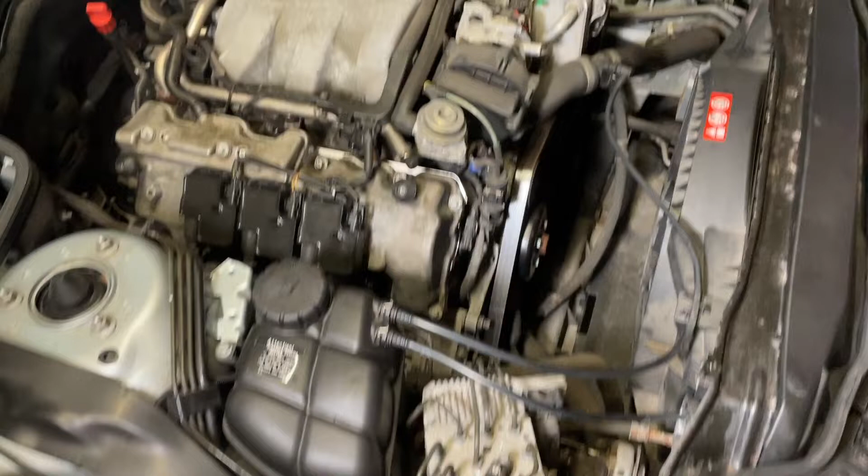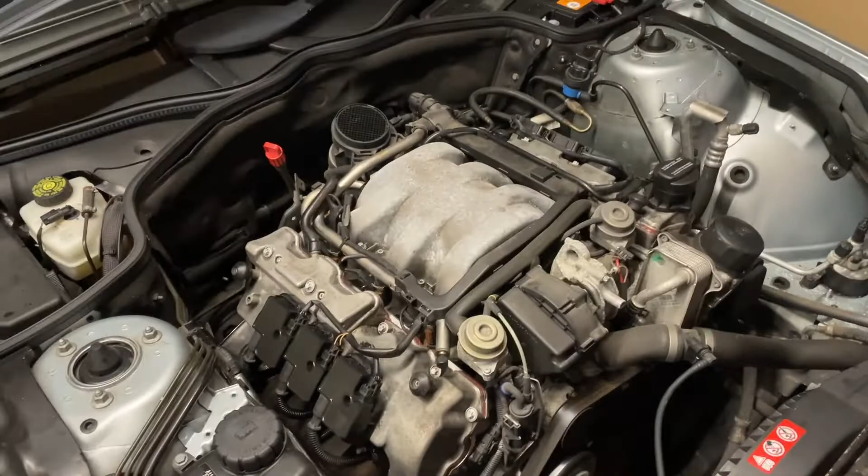Victory! Yes! Even the fuse diagram's telling me to buy an SL55 AMG.

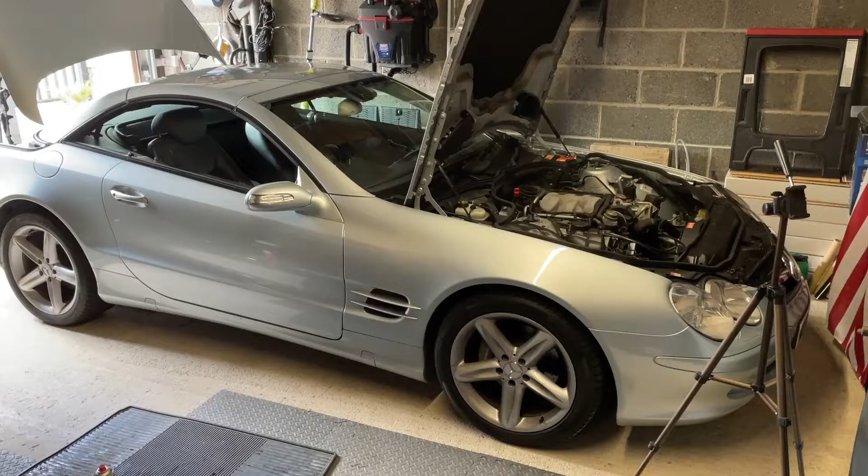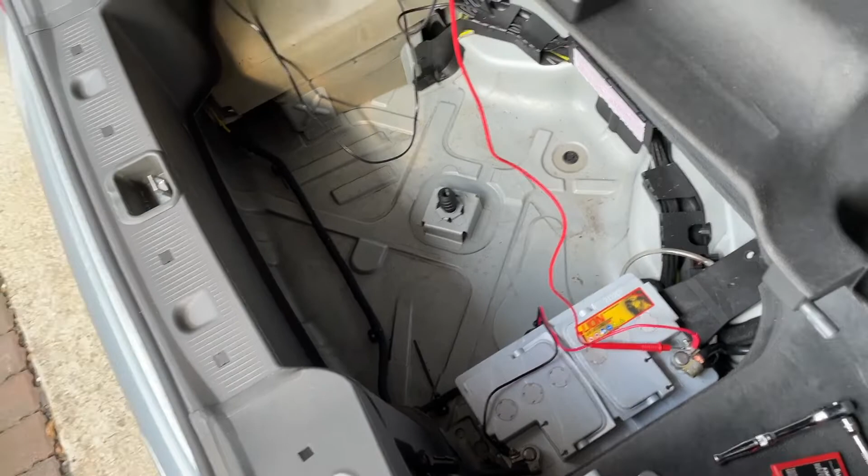Good morning. It is the next day, as in the next day after the last video I released, and the car battery drain issue is still the one I'm looking into. The battery is now back in the car. It's been off charge for about 24 hours maybe, basically since almost this time yesterday.

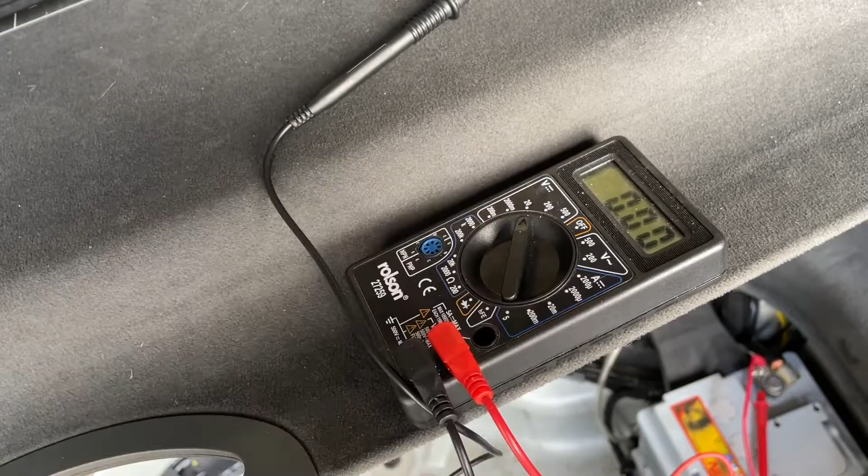And what I'm going to do live is turn the multimeter on to volts. 12.53 volts. So that is pretty much what it was resting at when I had it sitting out of the car. Tiny bit low, but still acceptable.

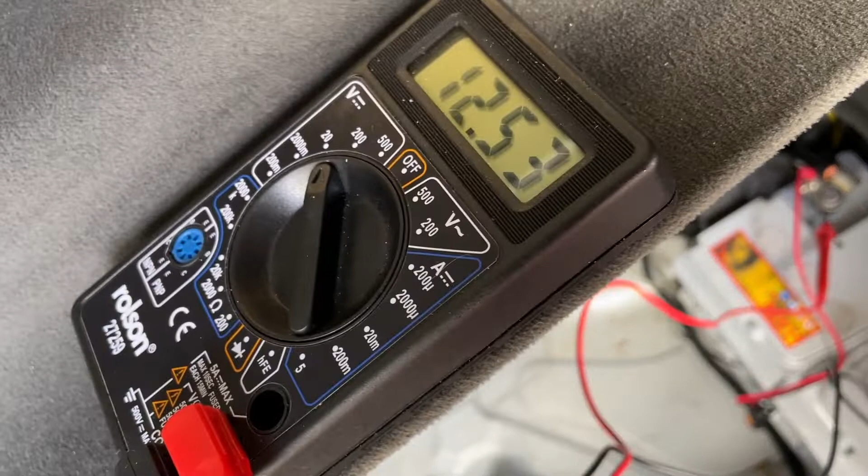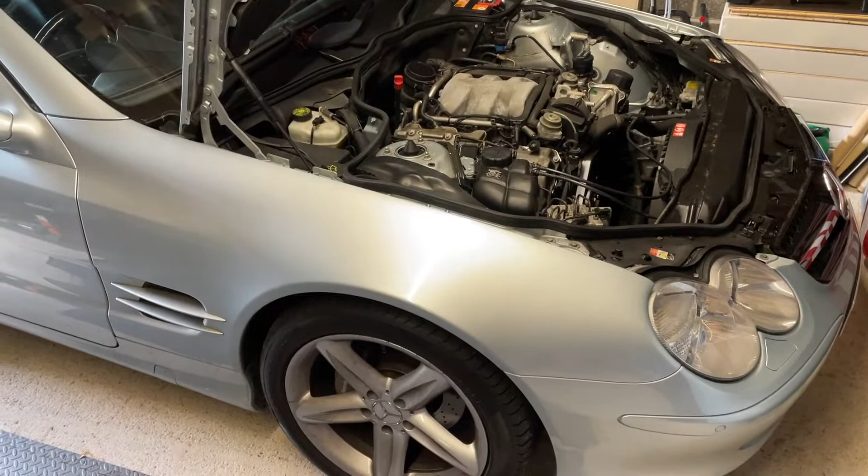Now, what that would suggest is that there isn't a drain at the moment. So what we've done so far is I've taken the battery out the car. It was sitting at 11.4 volts. We have charged the battery fully till it got to 12.6 volts, and we then left the battery sitting for over a day, came back out, tested it a couple of times, and it rested at 12.54 volts. So I've put it back into the car.

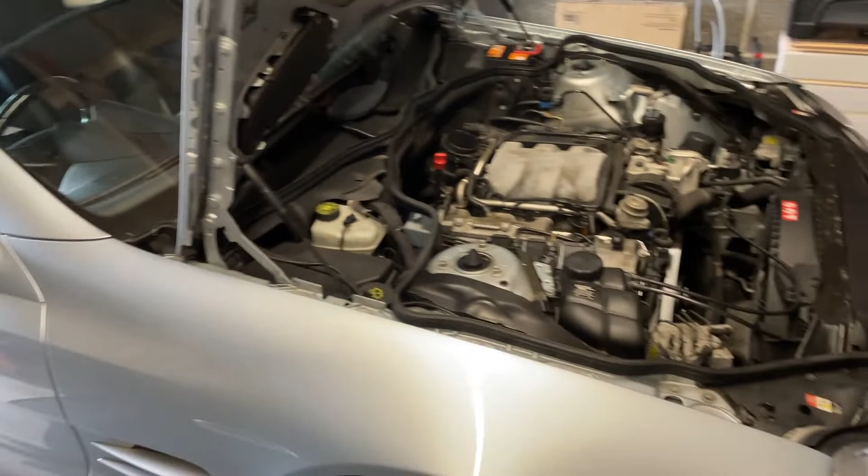Granted, the alarm system isn't switched on, the lock mechanism isn't switched on. I tested it in the car with the car running, so we did run the car with a new valve cover gasket and it's okay. And the alternator was charging it up to 13.6, 13.7 volts, so the alternator's working, it's charging it, and now the car's been sitting, sleeping.

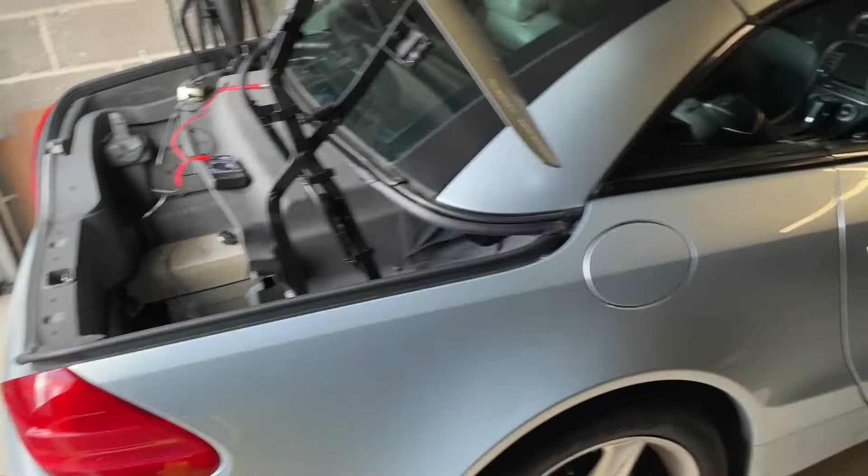All the systems will be asleep. I turned the lights off because I've had the windows open, I've had the doors open, I've got the trunk open, and the trunk light is out. What I should have said right at the start, throughout this whole process I've had the trunk open. I removed that light, that one there. So obviously that would drain the battery if it stayed on all the time.

And the voltage hasn't gone down any more than it did when the battery was out the car. Now that would suggest that there isn't a drain of any significance. If there is, it's a system that isn't on, which is the alarm and the locking mechanism. But I pulled the fuse last night for the lock and for the PSE pump, and it was absolutely fine.

Oh my goodness, this car's been in here a couple of days and there's already cobwebs. What's going on here? Oh my lord, cobwebs everywhere.

Jeez. So if we press this now, this should work because the battery's now been reinstalled.

My helper today is currently sitting in watching Marvel films, so I'm not interested in this boring stuff.

So that's the fuse box that holds the fuses for the pump, the PSE pump, and various other bits and pieces that I will pull and see. If there isn't an active drain, it's going to be difficult to use that method to actually figure out what's going on.

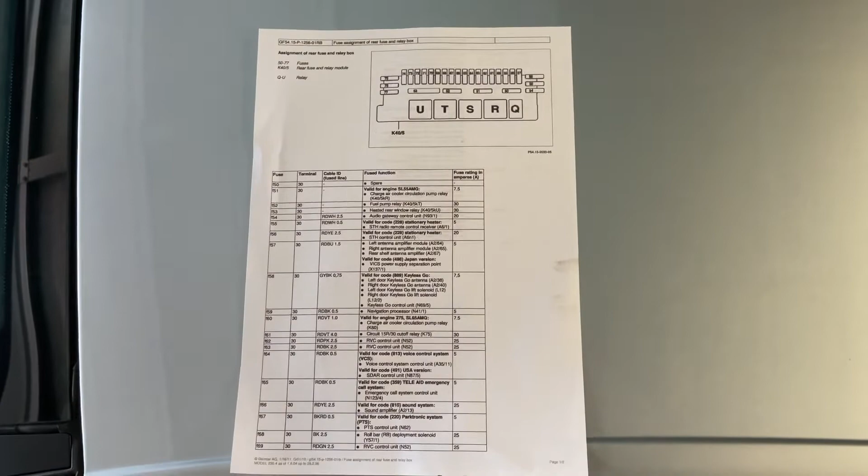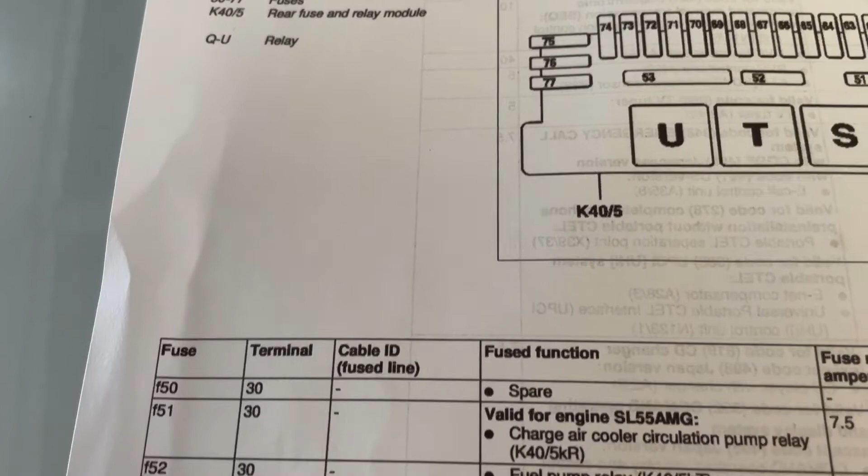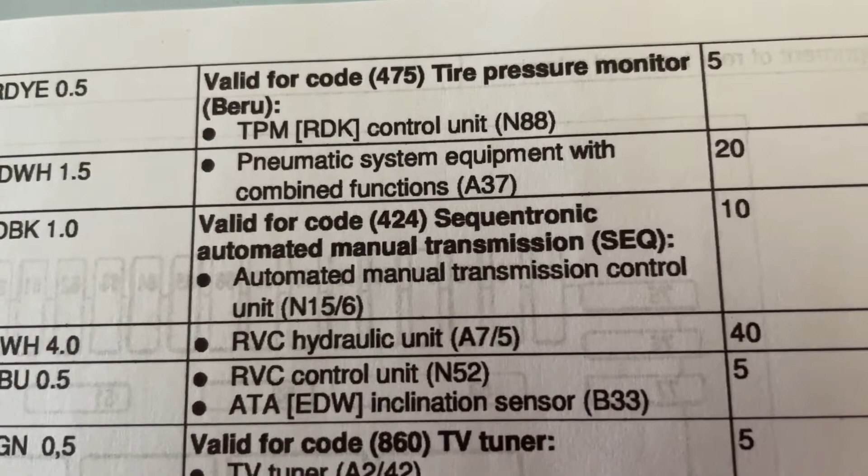So here we have the diagram. You can take a screenshot of this if you wish. This is the fuse diagram for this car, for the fuse box behind, in my case, the driver's seat, but if you're in America, the passenger seat. So there we go. That was, I think I said in the last video, it was fuse number 20. It's not, it's a 20 amp fuse, sorry. It's a 20 amp fuse for the pneumatic system equipment, the PSE pump, and it's position number 71.

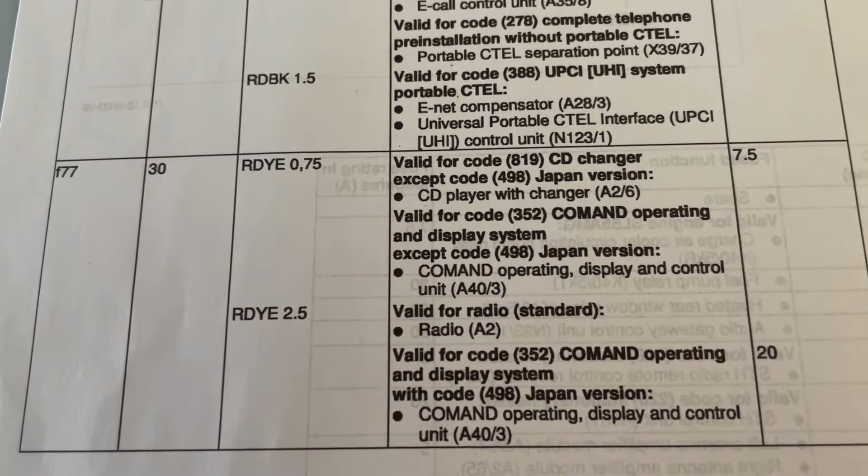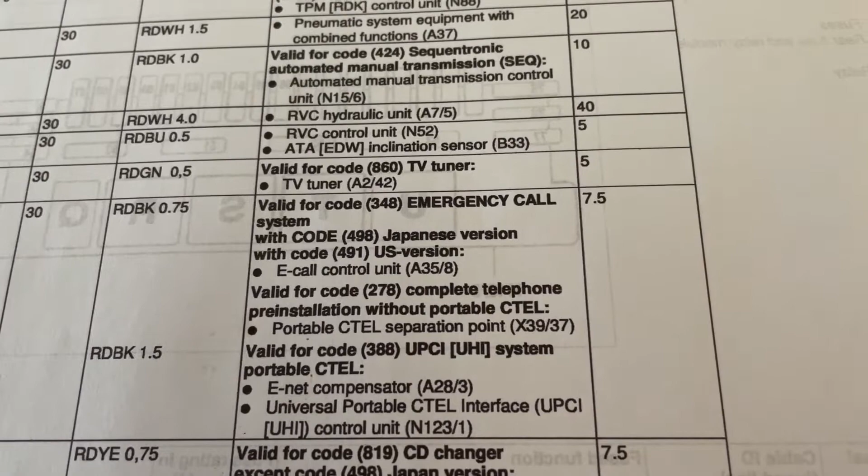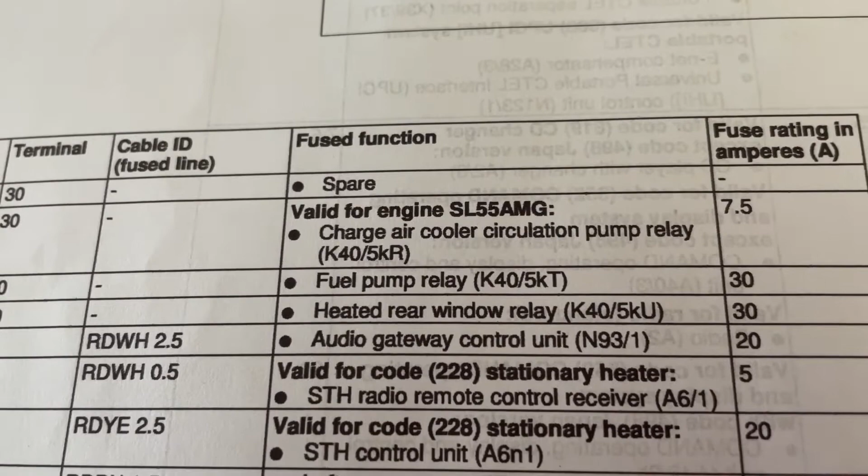So this is quite a handy guide that I downloaded from the web. So we have fuses here for the CD changer, for the radio, which is what I thought it could be, the COMAND system. We have fuses for emergency call system, which I don't need anymore. TV tuner, don't have that. RVC hydraulic unit, control unit, and there's some that are just valid for the SL55 AMG. Even the fuse diagram's telling me to buy an SL55 AMG. You know, it's just thrown it in your face.

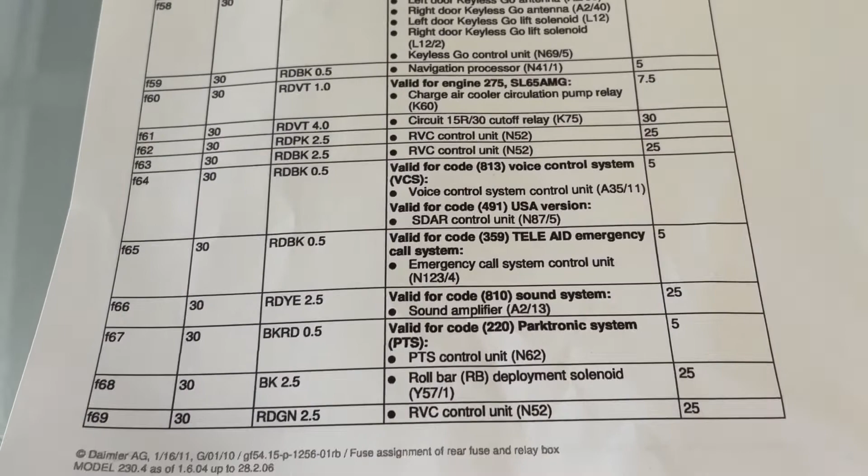So these are the ones I'm going to be checking if we had a significant drain. Now, I did have the drain, it went down to 11.4 volts, so pretty significant. That's basically the battery almost at 50% charge.

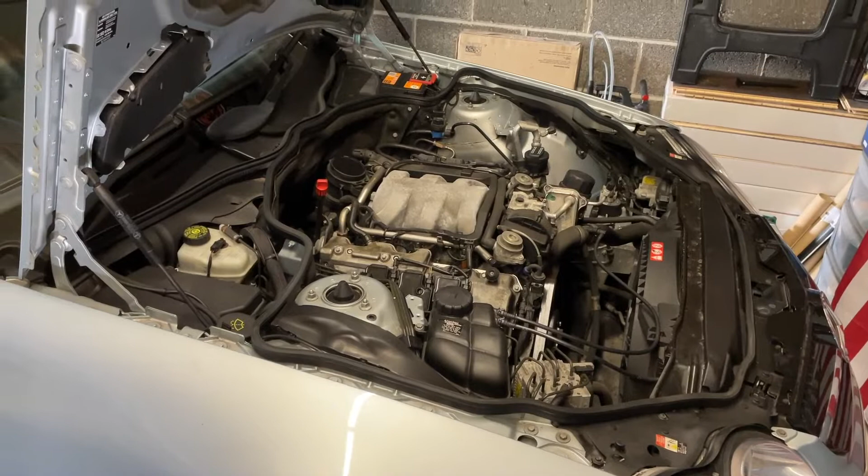What to do now? I think I'm going to get a clamp meter and clamp it round the negative terminal so that I can tell if there's a drain. The multimeter can do it, but you need to disconnect the negative terminal on the battery to do it. So I'm going to get a clamp meter and clamp it around the negative terminal just to prove to myself there isn't an active drain.

What I'm going to try is locking the car and seeing if I can still pick up a drain somehow. If that's the case, it's the locking and alarm mechanism doing it. But I've checked the back of this car, and there doesn't appear to be a tracker fitted with a secondary battery, which means that's not the cause of the drain.

So it could be that dome light, having said that, because I did turn that off last night. Hey, I can live without a dome light. But we'll fix it anyway, so let's crack on.

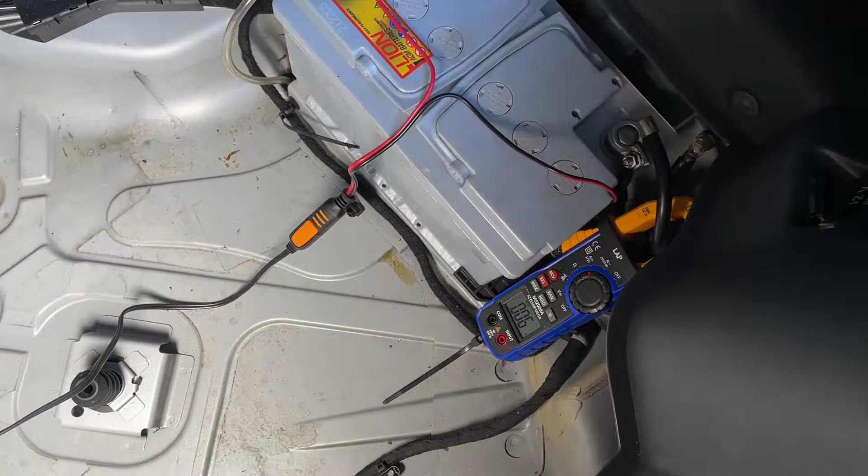Okay, we are back, and the battery's still sitting at full. You can see we've got this clamp meter attached to the negative cable. Right, let's just hold it right there.

Can anyone spot a deliberate mistake? This clamp meter only measures amps for AC current, the little wiggly line next to where the red pointer's pointing. It doesn't measure DC on the clamp meter itself, on the jaws. So whatever reading I'm getting here is probably not correct. Pretty much chuck out anything I'm saying in this section because I don't think this clamp meter is going to be accurate. I'll try to buy another one and attempt to read the DC readings, but you'll find out later that I've got another way of finding out if the battery's okay or not.

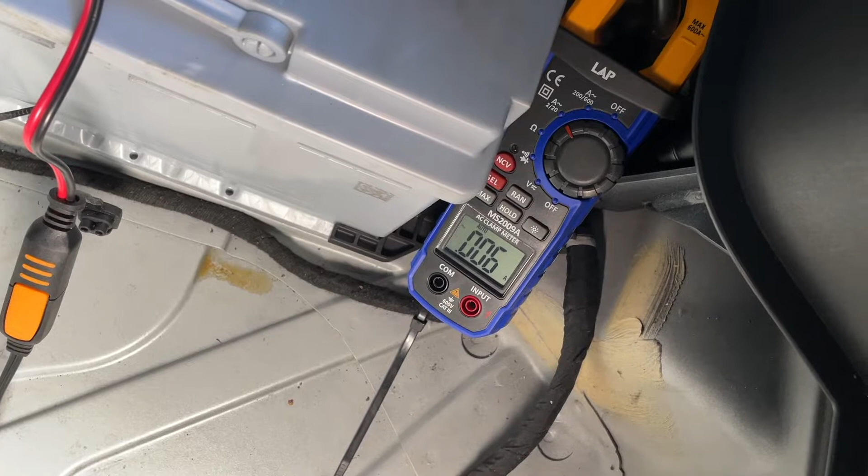And what I want to see is, does the light go out when I shut the boot lid? I'll lose my phone forever here if I can't get the boot open. Well, you tell me, did it?

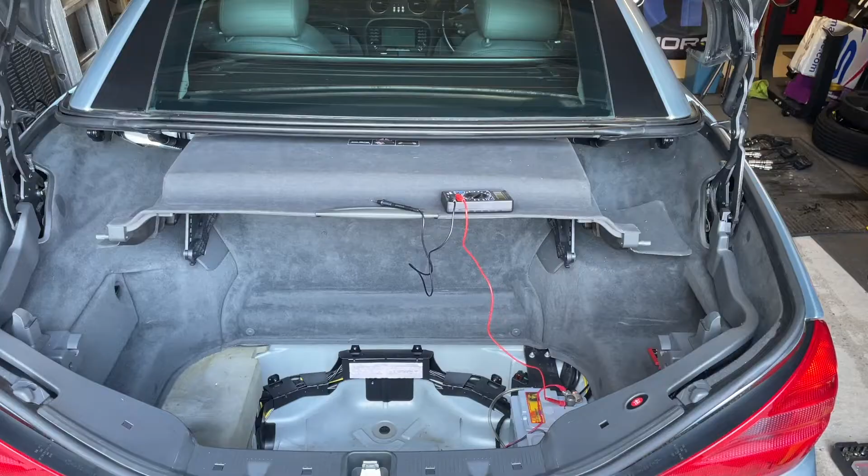Alright, so this is going to be the final test I'm going to do on this battery, because as you can see here, even with this light on and the car sitting resting, there's 20 milliamps, 21 at most, coming through the negative battery cable. Now, comment below if you think that's a significant enough drain to drain this battery over the course of a few days, because when this light's off, that drops to 6.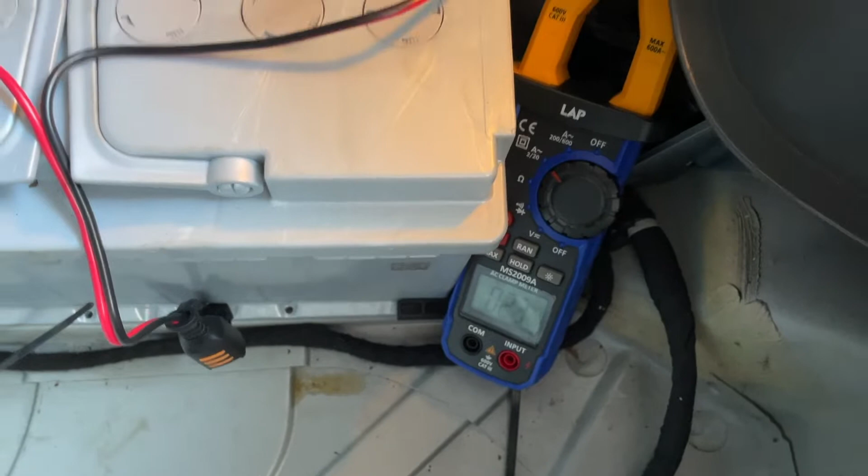I'm not going to take it out just now, I'll just put it back together. And if you look now, the battery has been sitting in the car for about 3 days and it's dipped below 12 volts again.

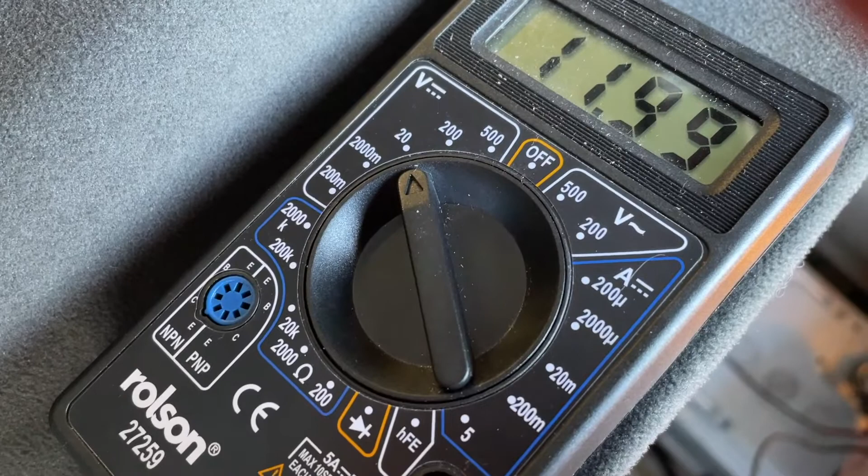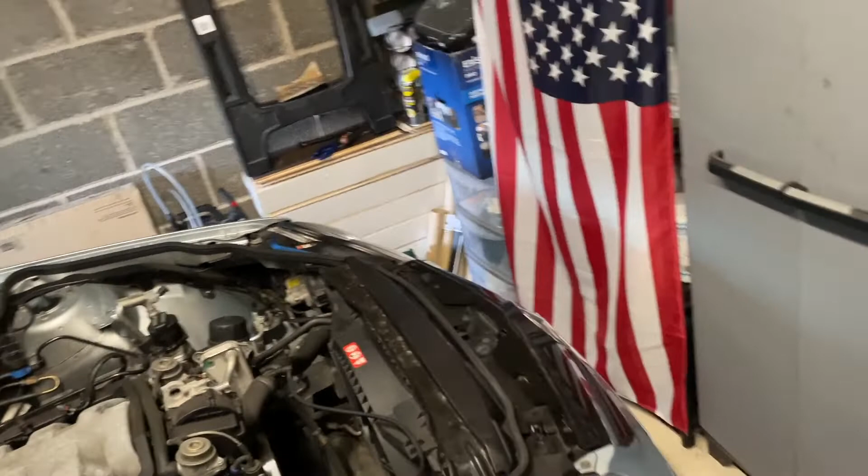So, to conclude this again, the battery is draining out of the car slowly, and according to the clamp meter, there's only 20 milliamps with that little light on, even less with the light off.

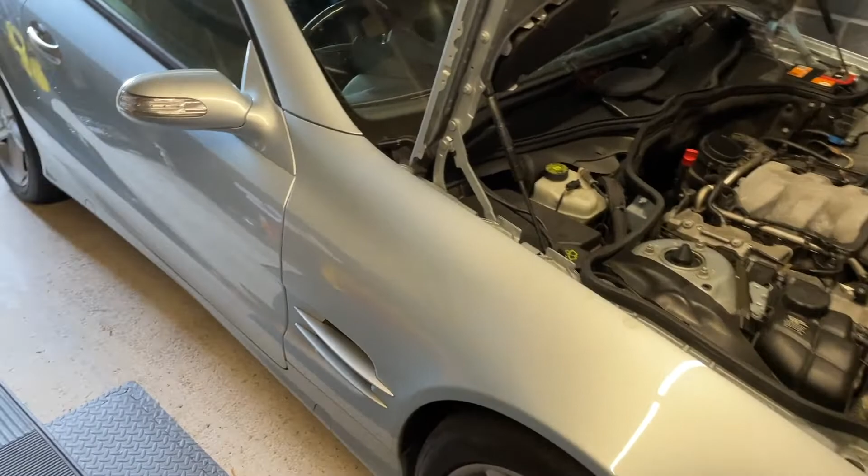So what I'm going to do now is take this battery out and go and return it and get a new one. But I'm going to get a Varta, because this battery was pretty cheap compared to the Bosch or the Varta ones that I could have bought. So let's go.

Alright, there we go, new Varta battery in, which was about £75 more expensive than the Lion one. So I took it back to the shop and no problems at all. They did say that the brand of battery I bought, they've had a few returns for the cheaper brands not holding charge.

So I thought, why not, I'll just get a replacement one, a better brand, more expensive, and it completely rules out any dud battery issues. So I'll check the voltage of this one every couple of days and see if it holds charge, and hopefully that should be the electrical issues resolved for now. Touch wood.

So, okay, so what have we concluded? Well, the battery takes a charge. You've just seen it, there is no significant drain with the car fully locked.

Even after 15 minutes it drops to like 6 milliamps, and there's no drain overnight. The battery was pretty much the same voltage this morning as it was last night. So no error in the dash, everything's reset.

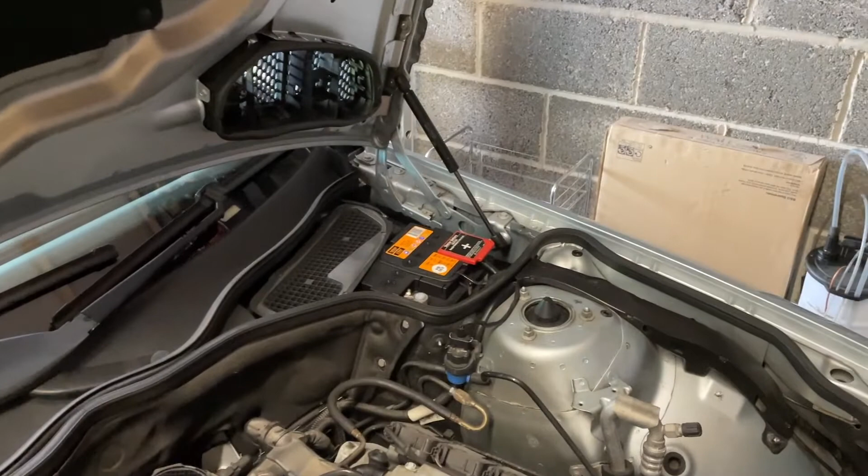There's also one here. There's one in the passenger footwell, I believe, and there's one behind the driver's seat. And there's a fuse just in front of the battery. So there's a few places where you can check fuses, but like I say, it'd be a fruitless exercise for me just now.

But if there's any R230 guys watching this, please comment below with your experiences with a battery drain, because although mine did go down to 11.4 volts, nothing's happening now. It's absolutely fine. So there's absolutely nothing that I can do to diagnose it. I'll just have to drive the car and see if it happens again.

So there we have it. We'll sign off on that problem just now. Charging the battery, taking it out of the car and checking all the systems and checking for the drain is probably the best I can do for just now.

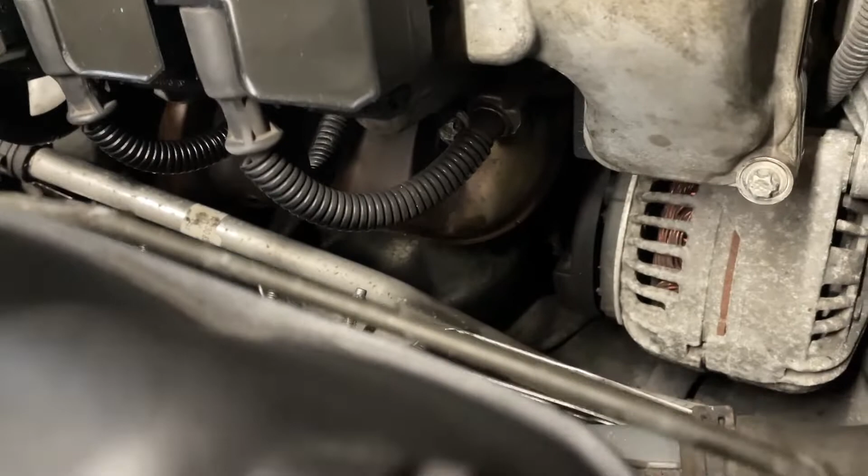So next up, I want to get the car back out on the road. I'm going to do that valve cover gasket over there, and we're going to give the exhaust manifold down here just a wee clean up, because when I did start the car, when I was testing for battery drain, there was a wee bit of smoke coming out. I'm pretty sure it's just the oil that has dripped onto the manifold that's starting to burn off as the car heats up. So we'll go for that.

And the more exciting thing is my mystery package has arrived from CKS Performance, and that is these. So we're going to be fitting them. I might just do it when I've got the car in here rather than taking it out and back in, but we'll see. So battery drain, not an issue at the moment.

Play it by ear. I'll keep an eye on the battery with a multimeter every now and again. We'll just see if it reappears, but the car's in pretty good health.

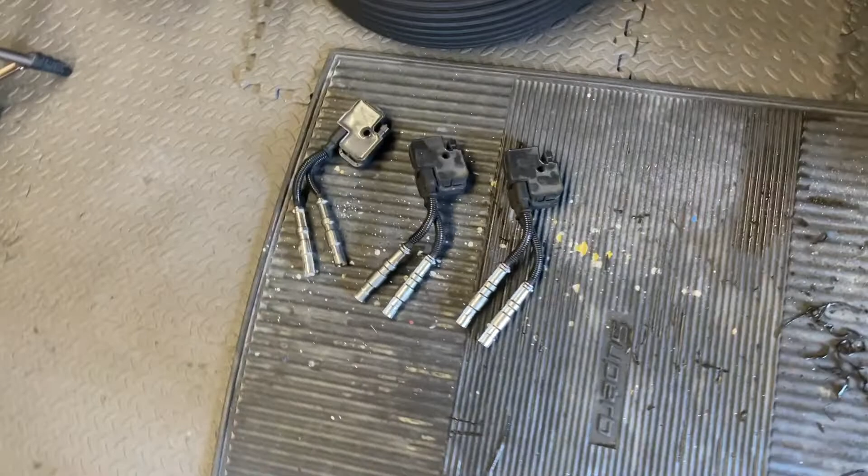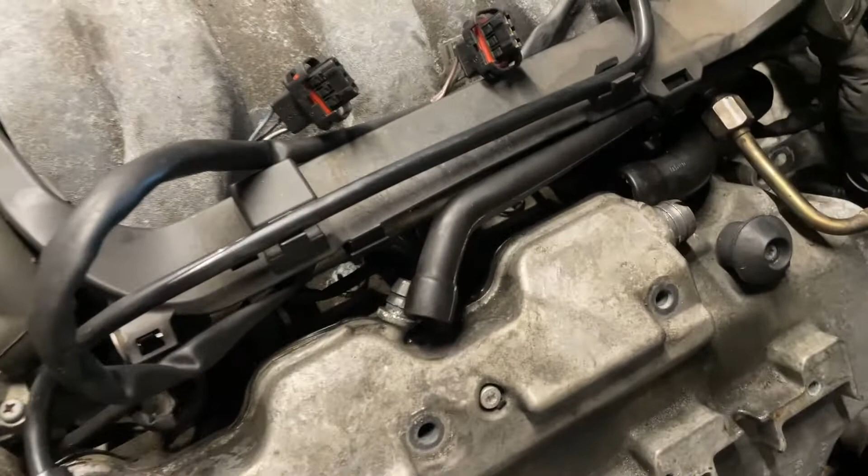I have at the moment coil packs out of the other side for doing the valve cover gasket, which I'm about to just take off shortly. The difference with this one is, like I said before, you get two PCV hoses. I actually ripped that one taking it off, so I do have a replacement. I'm going to put a replacement hose on.

They're pretty stuck on there, so I had to use some silicone lubricant, WD-40 type stuff, to squirt into them and get them off. Now I need to take off this. I don't have a crow's foot to torque this back, so I've just marked where it's going to be resting. And what you can do with this is, that's the fuel rail, obviously.

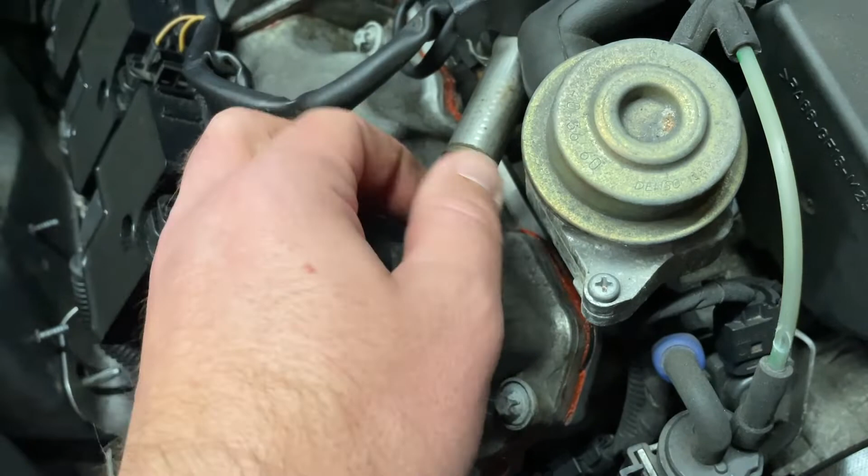There's a Schrader valve here that you can take off, and I've already done this off camera. So a little screwdriver in there, and it will squirt any pressurised fuel out. Get a cloth, put it there, and it will take just a little bit of fuel out of that rail.

I didn't have any because the car has been sitting still for a good number of weeks now. So you will still get some spillage, which I'll video when I take this off. All you need to do is put a cloth underneath and mop it up, make sure it doesn't drip anywhere, and you're good to go.

So this was off easy peasy as well, no problem, all the bolts are out. I've reused my magic bolt holder for this side, so we'll finish that job off today or tomorrow. Same video for you, and we're good to go.

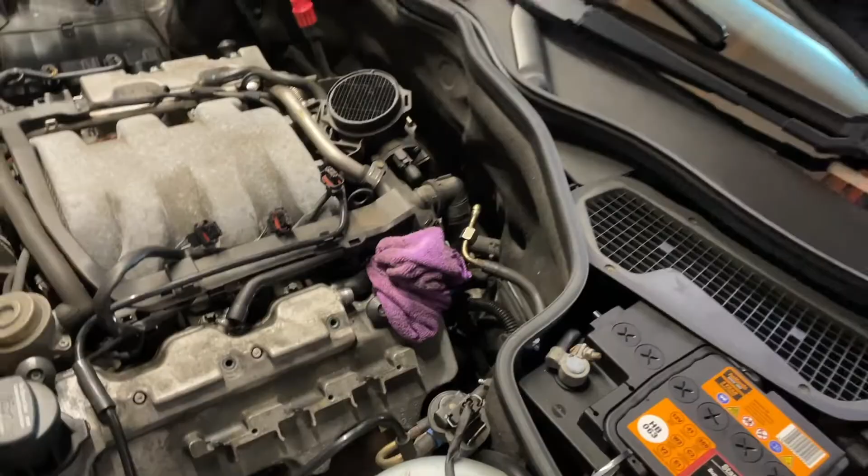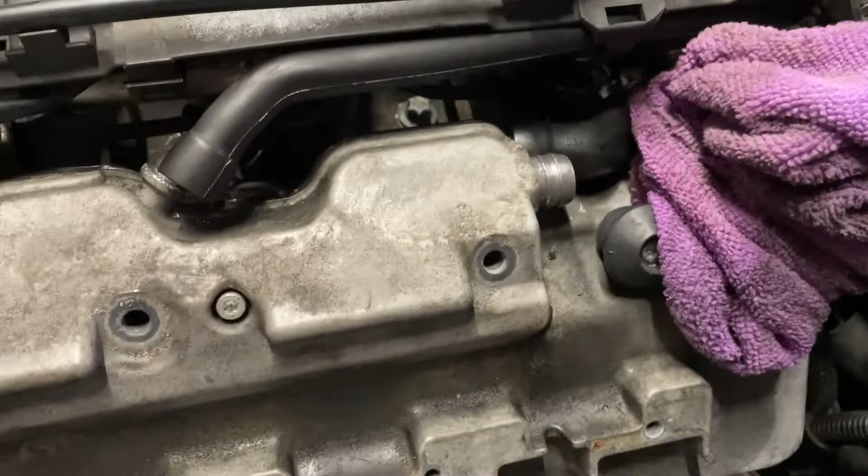Okay, crack that 17mm nut there loose, and this pipe, just stick it off to the side, and the fuel will start dripping out of the fuel rail there. So I'm just going to leave this cloth there to mop it up and then chuck it out. You see that little pipe attached there, and the fuel just kind of drips out. It's not a lot, just enough to be soaked up with that cloth. Then the valve cover will be ready to come off once that pipe is out of the way.

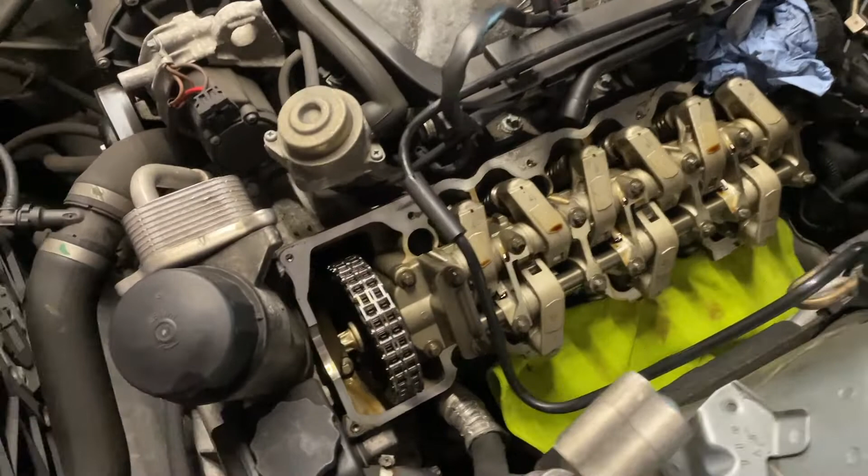Alright, so we have the valve cover off and the gaskets off the cylinder head as well. Just taped up the wee fuel inlet there and put some paper towels there just in case. This side looking okay as well, no immediate signs of any damage or anything like that.

But this time I have put a towel down over the exhaust manifold because I'm taking my time with these gaskets and cleaning the valve cover, so there is oil dripping onto the manifold, and I don't want a repeat of the other side when I slightly panicked with the smoke that was coming off it as I started the car, so trying to avoid that this time.

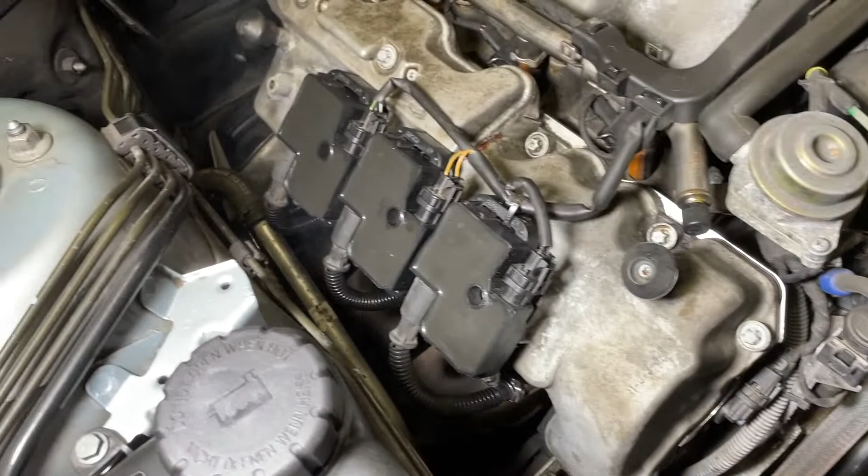So this is the result after I started the car and did the first valve cover gasket. Lots of white smoke, and it was just oil that had found its way onto the manifold itself and was burning off. Harmless, it will become less the more you start the car, but I did go and give the manifold a good clean, and to avoid that on the second side I put down a green microfiber cloth to try and help.

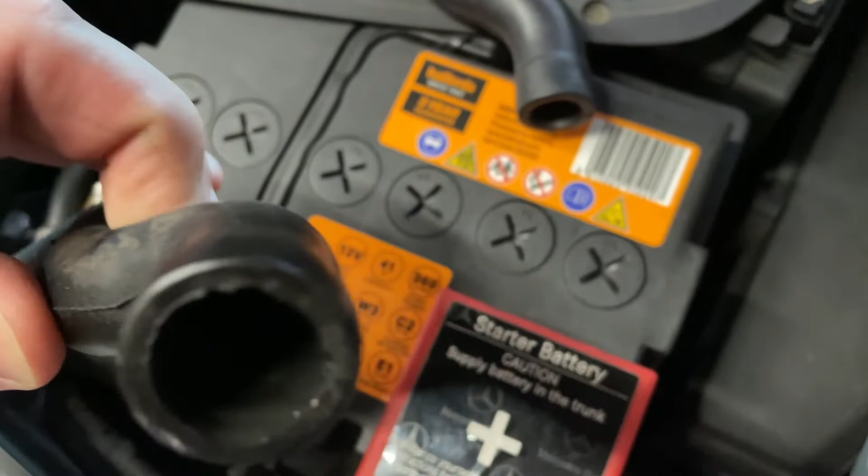Plus I did burst one of the PCV hoses this time taking it off. It was just a bit brittle and the actual hose is split. You can see that there, that one got split at the end. But like I said before, thankfully I did buy some replacement hoses, so this one just connects to here and goes into the air intake there, so that's pretty straightforward to just pop off.

They do get brittle over time, so I would probably buy the full pack of these like I did if you're doing this job, just in case some of them do break as you're removing them, which just happened to me.

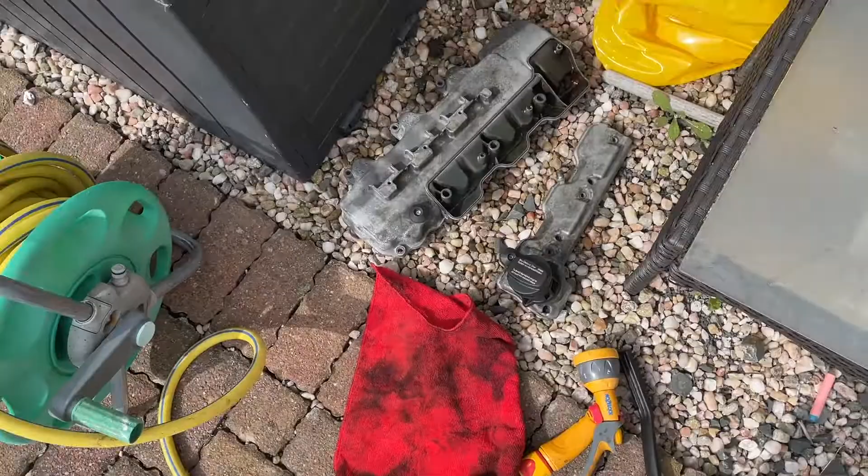So I do have an alternative parts washer, which, I better not let the other half see this because it could get messy on the chips here. However, I cleaned them up as best I could before I brought them out of here, gave them a rinse down.

And we'll now put them back in, and we're going to put the little red RTV along this gasket line here to attach this cover to the main one.

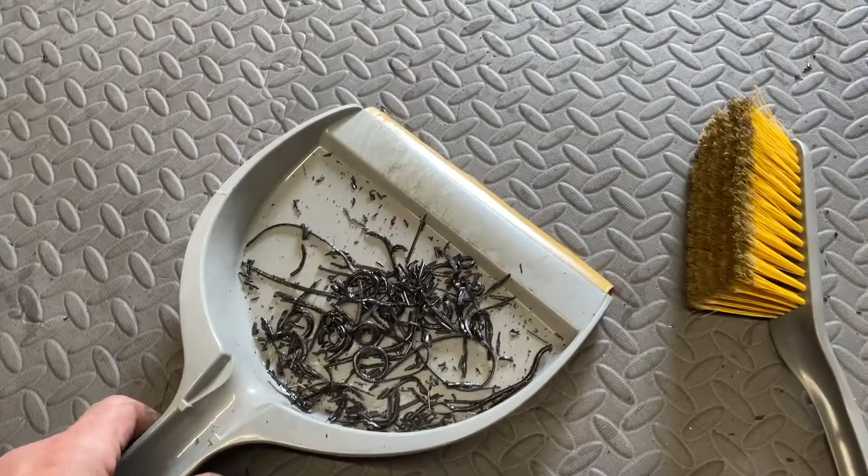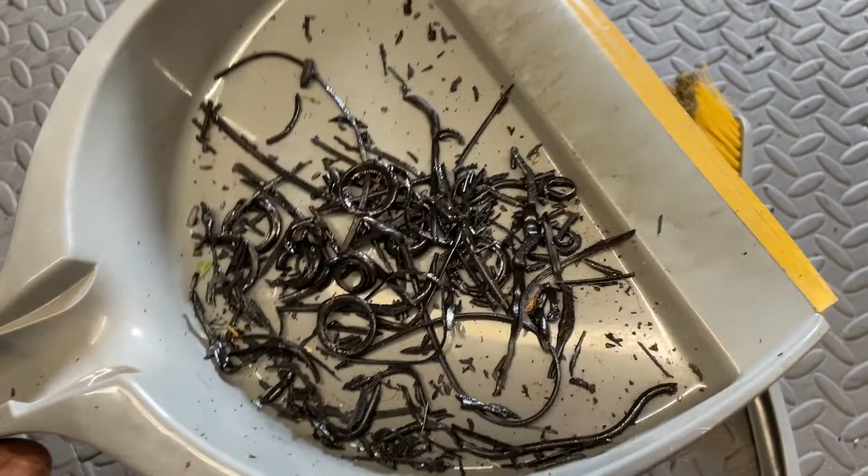So here's all the remnants of the old gaskets on the PCV covers. Guess how long that took me to pick off and clean, because if you don't clean all this off, it's never going to reseal properly. Mercedes could make a jigsaw gasket out of that template and start selling it, and it would save a good few hours of time.

Anyway, only one place for this: the bin. Job is done.

Both gaskets are back on, gasket covers are back on with the new gaskets. I've hooked up the coil packs again. We've tightened the fuel nut back so we can see that line at the top. We have both PCV hoses in place, and I'll probably wait until tomorrow until the red RTV has a decent amount of time to set, and then we'll start it.

We'll see if we have any smoke coming out, because last time when I started that side we did. But I haven't seen any evidence of it leaking or oil dripping anywhere, so I'm pretty confident it was just me spilling it on the manifold while doing the job. So engine's back together, new batteries in the trunk. We're almost ready to start the car again, hopefully get it outside for a wee while before the summer finishes.

Victory! Yes! It's alive!

Nothing's hooked up again, and so far, no smoke. Last time I was just spilling oil because I did this side and it smoked as well. I am absolutely brilliant, happy with this, this is great. I'm going to get the air intake back on, but I'm going to leave it running for a wee while and just make sure everything's okay. But so far, so good.